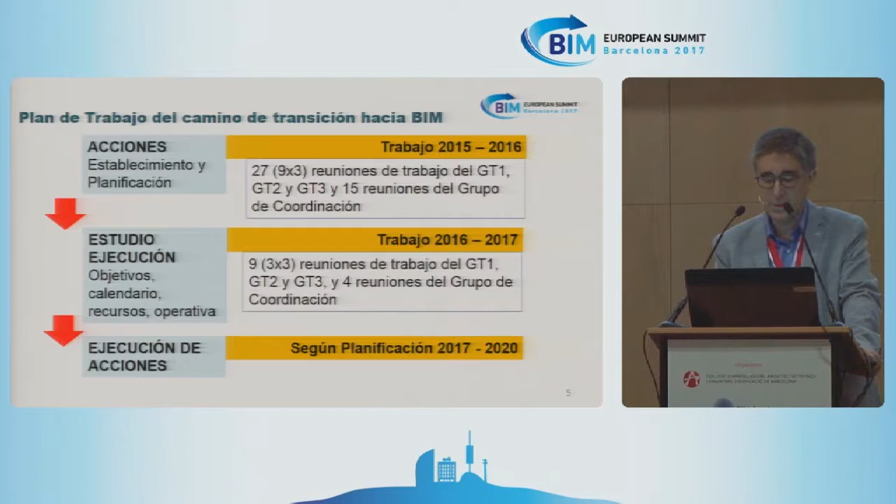According to our planning, we will celebrate many more meetings between 2017 and 2020. And how do we want to define and analyze all these actions that will be implemented? Victor Roch actually provided us with a roadmap based on the Canadian roadmap. Many things have been invented already, but we have so many choices available that this roadmap was a great finding for us.

In this roadmap, some axes were defined. In this case, there were 8. We can see 7 on screen, and then we have the 8th one, which is cross-cutting. Basically, these elements wanted to find some starting points and also set some finish points. Once this was done, we needed to define the actions and the timing needed to go from the starting point to the finish point.

In all these starting points, as I said, there are 8 in total. The first one is to align. This is very small on screen, I'm sure you cannot read it, but if you're interested, all our paperwork from the European BIM Summit will be available in a Congress book containing all the presentations, and you will be able to read it there way better. So if you are taking pictures, I know you won't be able to read it because it's too small, but it will be available afterwards.

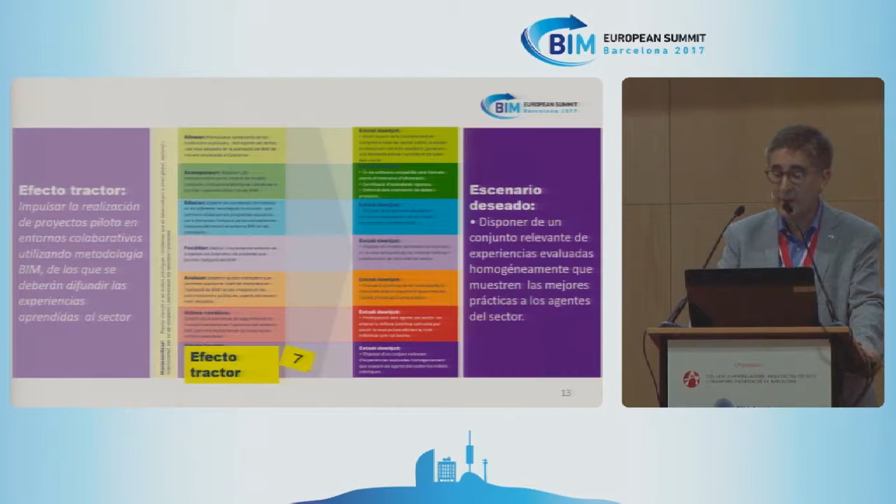We want to have the desirable scenario of having a set of experiences that will show the best practices to the different stakeholders.

The eighth axis is a cross-cutting axis. We want to harmonize. We need to pay attention to the best practices and initiatives at a local, national, and global level in order to share and harmonize processes and results. It doesn't have number 8 on it, but this is a key axis.

So far in our summit, we've had different speakers that have brought a lot of information and knowledge. However, if we only focus on Catalonia and Spain, we'll see that this is something we are working on.

Some may wonder, es.BIM does some things and then the people working in Catalonia do something different. No, we work in a parallel manner. We are always in touch. We know what's going on in es.BIM and in the Catalonia agents.

And this is a cross-cutting axis, trying to unify, trying to make everything homogeneous, and also making information available for all the parts that participate. This is very important because we need to move forward together with other committees that are also working in this direction. Maybe they are doing it in a different way, but with the same goal in mind.

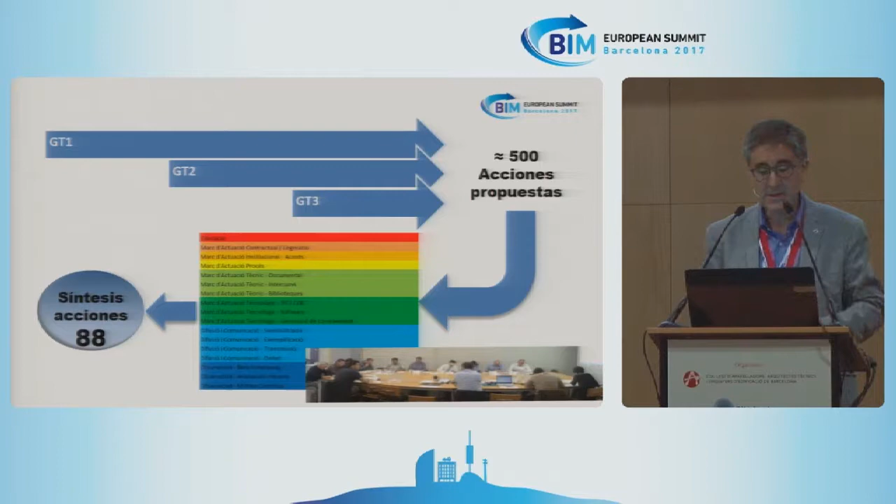The ITEC did a lot of work here, and we reached the conclusion that there were 88 actions that actually summed up the more than 500 proposed actions.

These actions have been defined. There were many personal surveys. As Mr. Rule mentioned this morning, all the members of the Building the Future Commission answered a survey, and after we got all the results, we got information about costs, timing, and priorities. We wanted to hear the voice of all the agents in this sector, and we wanted to know their opinion regarding all these aspects, because they are very important to clarify before we start moving on.

So after we got all the information from the surveys, we were able to make some agreements. We performed some studies, found tools, and were also able to promote outreach, create debate forums, and get some pilot examples.

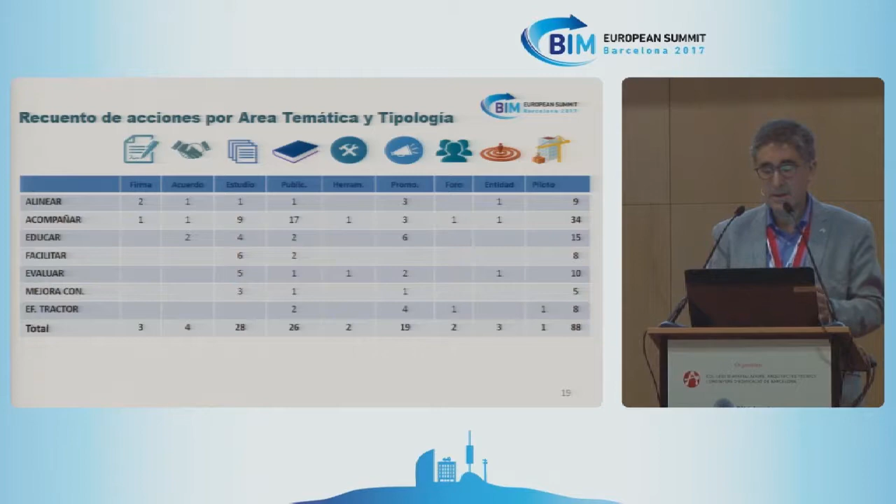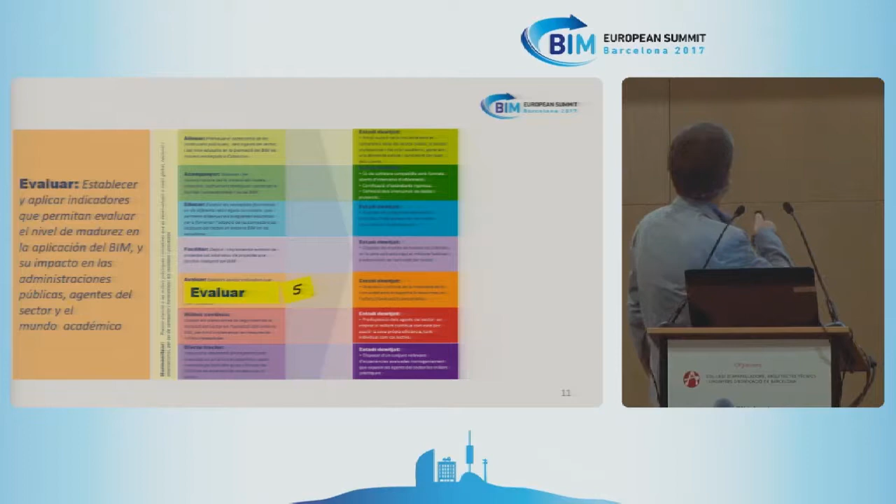These 88 actions have been planned, and we can sort them out by topic and different aspects. The result, if we look at it from a starting point perspective, we need to remember now. I'm trying to find it. Okay, so if we go from the starting point to the finish point, we will get to the last slide that we saw. Actually, right there, it's where we find the 88 actions divided by terms, or semesters, rather.

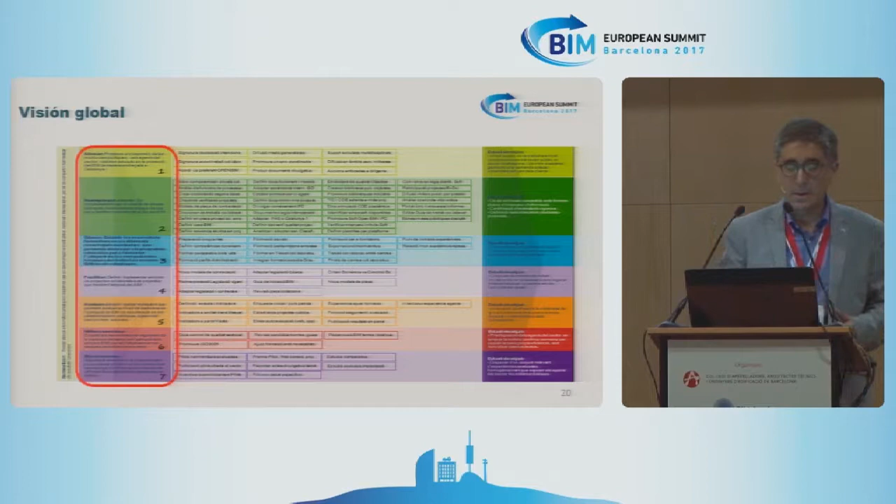This is what ITEC actually presented in the last assembly, where all the members of this commission attended, and I think that was very relevant. The members of the commission decided to bring their own funds in order to finance the first steps of the development of these actions. They didn't want to wait for public administrations to undertake this task. This is quite interesting, and I think it's worth highlighting, because they thought, well, if someone else does not do that for us, we'll do it ourselves.

So basically we see that we had the starting point and the finish point, and in between we have all these planned actions. Right now we find ourselves here, and then we are entering the second stage, answering how, when, and how much in order to implement the actions. I think I'm out of time, sorry about it, and I think that's it.

We actually got the agreement from the plenary assembly, who in March last year decided to move one step further so that the members of the Commission would finance the first steps. There are 40 of us, and we are welcome to have more people joining.

At the same time, as Ferran Falcó explained this morning, we have the Interdepartmental Commission of the Catalan government. They actually asked ITEC to draft the white paper to implement BIM in the public administration in Catalonia, which will also include the guidelines for this implementation. I also would like to remind everyone that BIM is just a part of three pillars: IPD and Lean. I think ITEC is one of the big supporters, and we have carried out many actions for the outreach of IPD, BIM and Lean as well. Thank you very much, and that's it on my side.

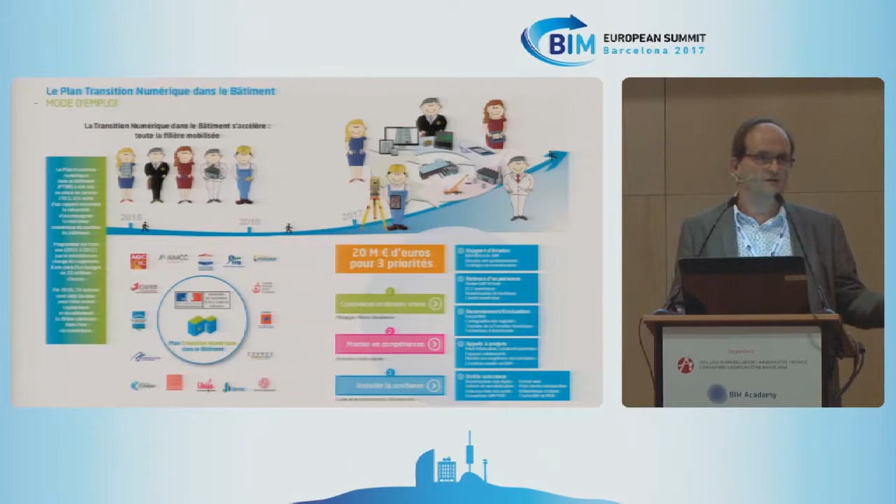This plan has 3 different axes. The first one is to encourage and motivate people to use BIM. The second axis, or pillar, would be to improve the competencies and skills in companies, architects, constructors, whatever it is. And finally, to install more trust. And to do that, we need standards.

A few outputs from this program or plan. The first one, guidelines for clients. This is very important because when a client wants BIM, they don't want to reinvent the wheel, right? So it's very important to provide the client with guides, also guidelines for the BIM exploitation plan.

Then we have a series of documents, for instance one regarding legal matters. Then we have the first draft of a dictionary of properties regarding BIM objects. Then we follow up some projects to define and identify best practices. Then we have actions to make an inventory of applications, software applications, formulation applications. We are also going to launch a collaborative platform, which is going to be free for small companies. And finally, there's the standardization roadmap.

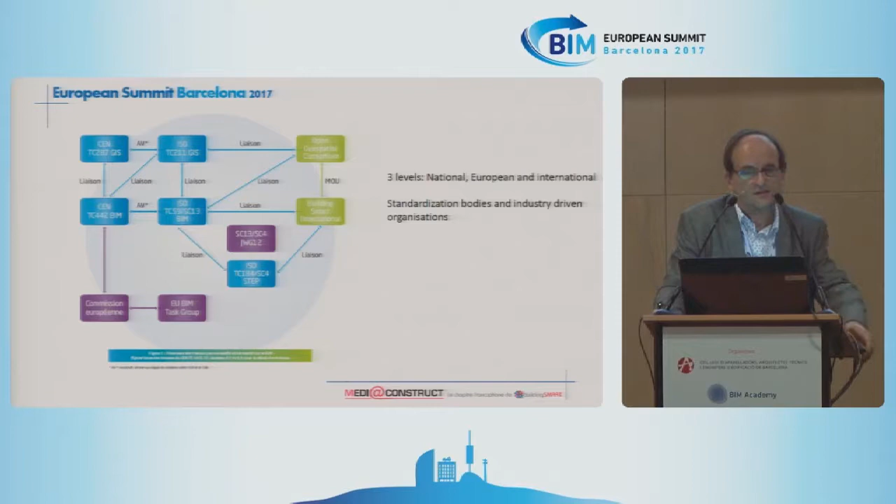This picture, this drawing, summarizes the content of the roadmap I just mentioned. It's the concept of a house with different floors. We begin from the third floor, which is the process floor. We are interested in the stakeholders and how they work. And the first technical topic here is the information delivery manual, which lays out rules and standards to define and describe processes and the information required.

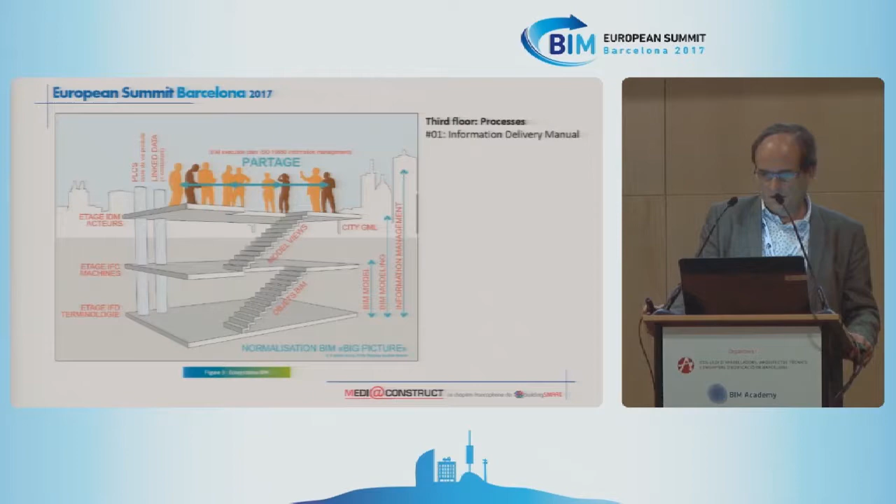The second floor would be about data, and there we approach the famous standard, the IFC. Then BIM must be an open format and also available to the public. Then there are initiatives to exchange comments on a specific model.

Then we move on to the first floor, which relates to terminology. The first thing we need is work on dictionaries. It's important, and for many years we have set the goal to create a multi-language international dictionary. I know it's hard, but it's really important, because the IFC is not enough.

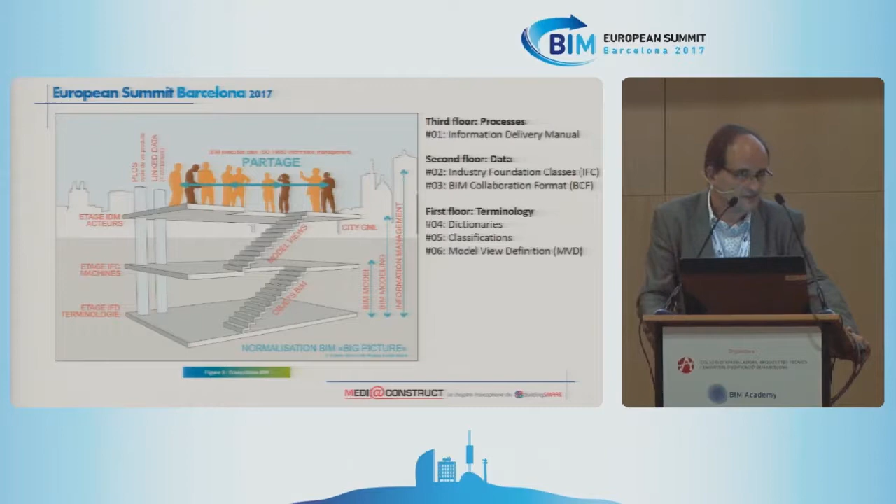We have to agree on the sense of each term and word. We also need classifications. In France, classifications are not widely spread. Omniclass or other tools may be used in other countries for classification purposes, but not in France. We need to pick some classifications, and currently there's a working group analyzing this different set of classifications to pick one, or at least adapt one of the existing classifications.

Finally, the model view definition. This is a methodology to define a set, or the whole model as a whole, and that would be it.

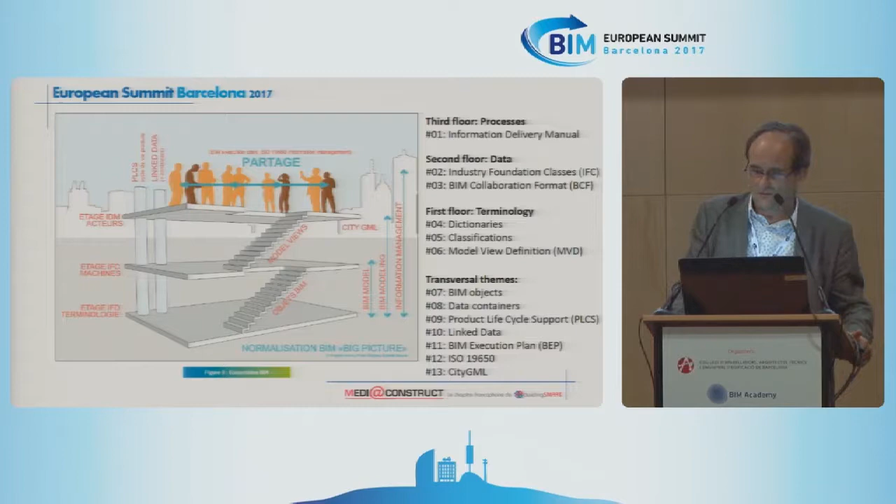Then we have cross-cutting topics such as BIM objects, different solutions that we call data containers. Then we have to bear in mind that when approaching a project, we have to think about the whole life cycle. The topic number 10 is linked data from the web. This is very interesting in order to exchange information between BIM and geographical information.

Then number 11, the BIM execution plan. Number 12, it's about a standard, an ISO, a standard in English.

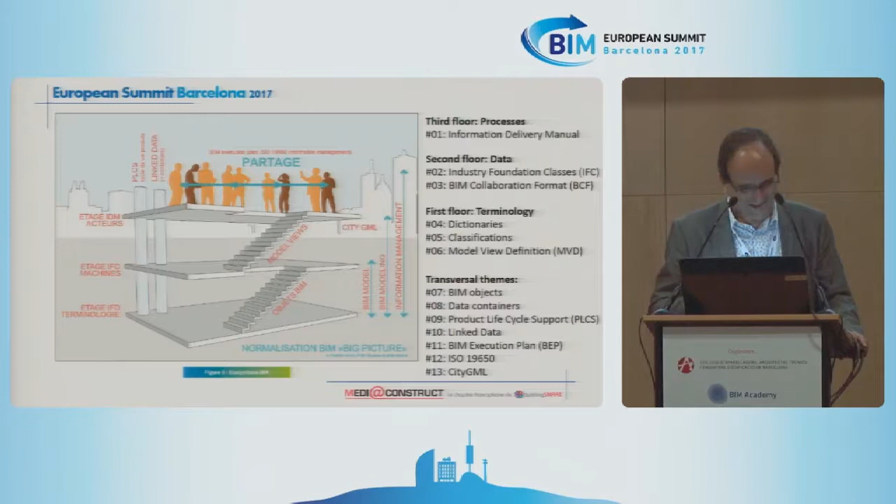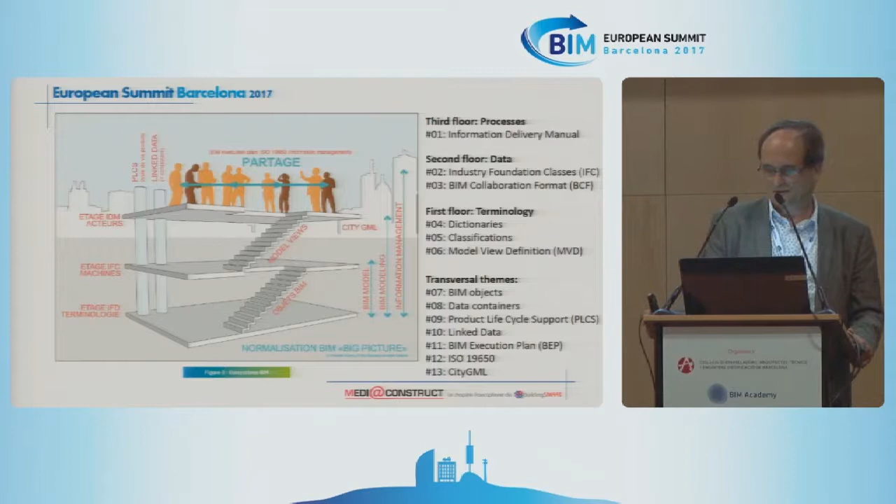And finally, the City GML. That would be the standard applied to cities, such as the IFC to BIM, then the GML is the standard for cities and municipalities. City GML is also a data model that complements IFCs.

And 20% of the contractors also used BIM, but that's a problem we have to solve in France. Currently, we are discussing with different companies and organizations so that more and more companies participate in these kinds of projects, both SMEs and large companies.

How many people in the audience have seen Marzia Bolpagni's Many Faces of LOD blog post? Only a couple. This was released last year in the summer of 2016. This is a fantastic blog post that traces the organization of LOD, which he uses as a start point, as you see on the screen, as one of LOX. LOD has multiple variations, multiple definitions. We use level of development in the United States.

If you're in the UK, refer to it as level of detail. But specifically tracking those starts, and the way we deal with it in the US, really focused on Vico Software back in 2004, which was really an originator of this idea of LOD.

In 2008, the AIA took that idea and started to apply more formal definitions. Those became part of our digital practice documents, exhibits to our owner-architect agreements and owner-consultant agreements, starting to set a foundation for what we're going to deliver as part of our BIM.

Ultimately, in 2013, the BIM Forum came along. BIM Forum's part of the Associated General Contractors of America, and they teamed up to author and further evolve those definitions, which has now really become a key standard in the United States. So those key collaborators are the American Institute of Architects, the AIA, and BIM Forum, which is part of the AGC of America.

We've been fortunate enough that as we've gained traction with this deliverable specification, we've been able to pick up more organizations, as you start to see at the bottom of the screen, that are becoming contributors. Since 2013, we've been able to progress and evolve this document to have an annual release cycle, all the way up to 2016, the current version available. If you go to the BIM Forum website and search for LOD, that's what you'll get.

Later this summer, the 2017 version will be out for draft and public comment, which anybody can provide feedback on. Our core group will get that information, and then we'll republish the 2017 version in November at our fall event. The big thing that's different about the specification is we're really not looking at BIM as a tool, a technology, a process.

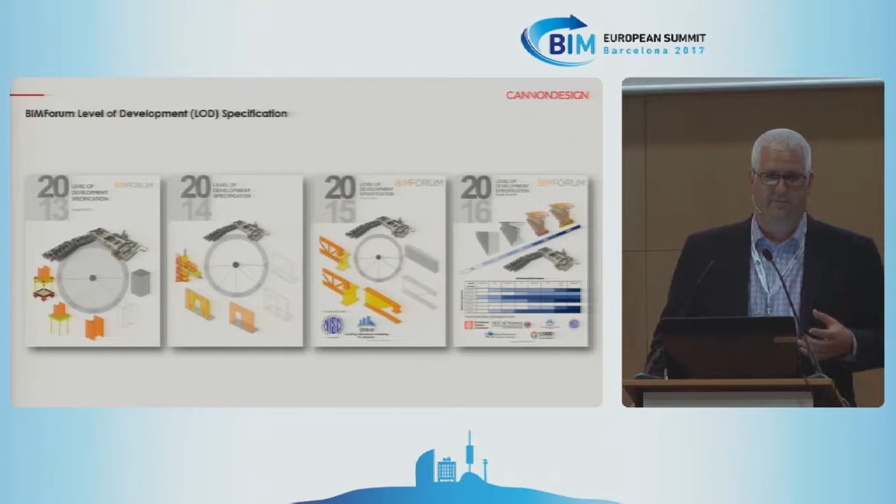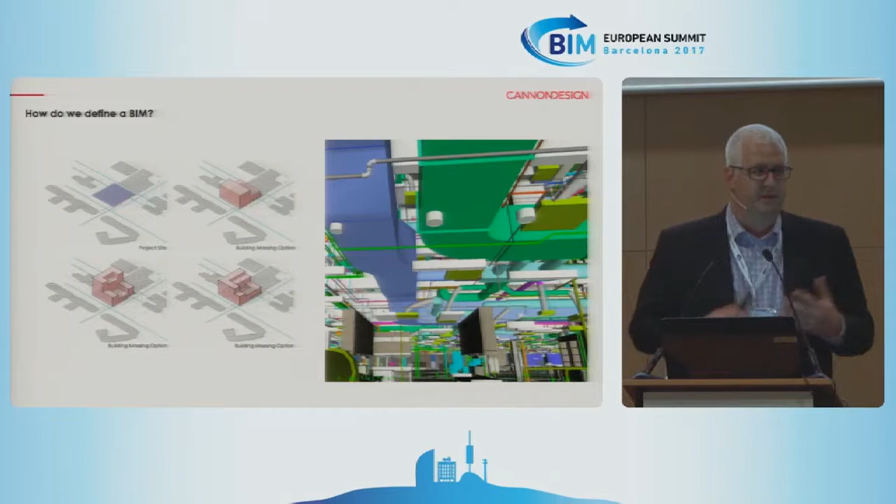The first one will allow you to do very early conceptual estimating, site orientation, get some sustainability feedback. That cost estimating is really an overall cost per square foot, how many floors, big round numbers that you're starting to get. I'd suggest that model has LOD 100 elements for walls, floors, and roofs, and that's really about it.

That's great, but we want to make sure there's not an expectation that you're going to be able to do clash detection, or shop and fabrication models—just like the image on the right isn't going to be capable of giving you those large, big picture schematic ideas.

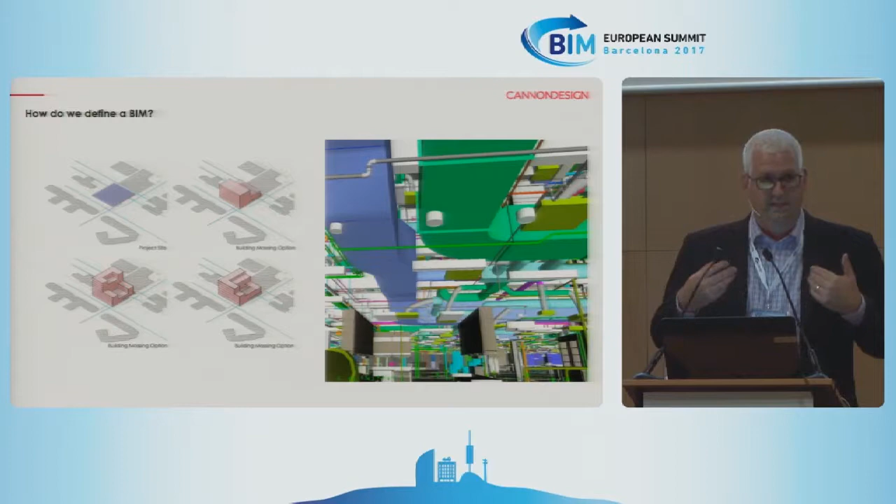We understood that there needed to be a way to define the differences and level-set those expectations, so everybody in the industry knew what we were talking about when we referred to level of development.

So in the release of that document, these are actually the major components that define what level of development is in the United States. The BIM Forum really set out to describe that as a way to articulate, with a high degree of clarity, the content and reliability of the BIMs we're creating—something needed over the course of the life cycle of the project.

One of the big things we talk about is there's no such thing as an LOD 100, 200, or 300 model. This isn't an inclusive description when we say LOD. It's about model elements, assemblies, and components—we're defining the wall, the floor, the roof, the door, the window, not the entire facility.

Those levels of development are definitions. It's like looking something up in a dictionary. It's not a prescribed standard. We're not telling the design or construction community that at the end of construction documents, your models and model elements must be perfect or meet certain expectations.

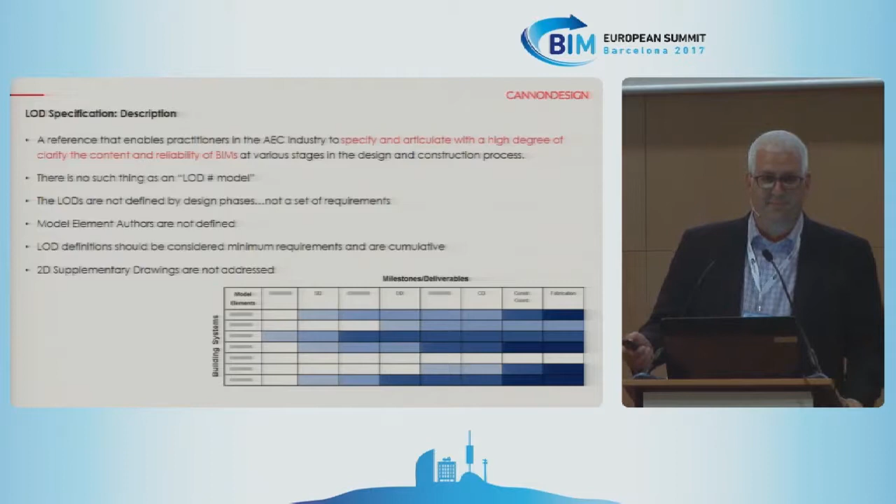We set the stage that these LOD definitions are minimal—this is the minimum benchmark to meet a certain criteria, and they're cumulative, building upon one another. They don't address two-dimensional information. This is a BIM level of development specification, so that makes all the sense in the world. It's really about how we're communicating.

There's information that we as an architect or engineer know about what we're documenting that the recipient, maybe the contractor, maybe one of our other consultants, will not necessarily know. It might be unintended information that isn't useful or reliable.

If we see the sketch on the left, it's just a door. All we know is there's a doorway going into a building, into a room on the left-hand side. We don't know the size, the height, or really where it's located. It's just schematic. If we look at a CAD drawing or two-dimensional output, now we're starting to benchmark where something is. We can put a dimension down and say this is where it's located. We can put a door number down so we can go to the specification of the door schedule and find very specific information out. In a building information model, we might simply put a door in.

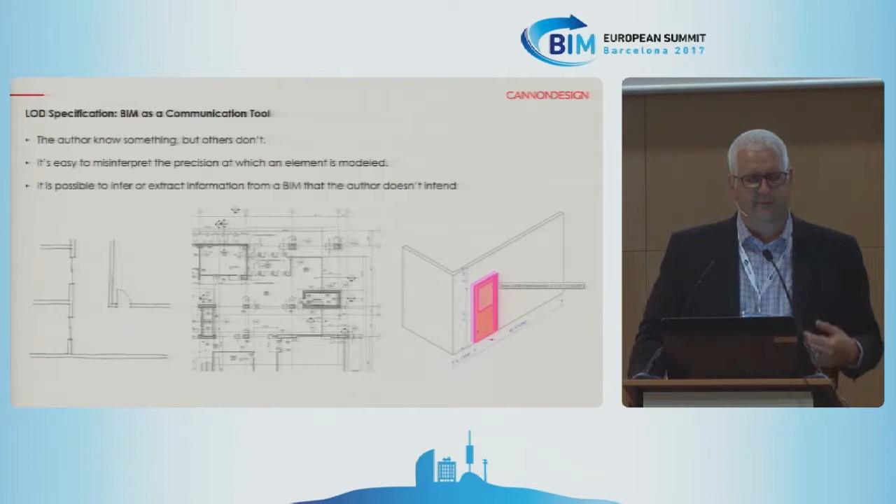Where is it located? We could get these strange, inconsistent dimensions. We may have just grabbed a door quickly out of our list and put it in as a placeholder, because it looks good in plan—that was the output. But if somebody selects it, they may interpret what door type it is, what material it is, what finishes are on it differently than what we intended as the designer. That's something we want to be able to control by using this LOD communication.

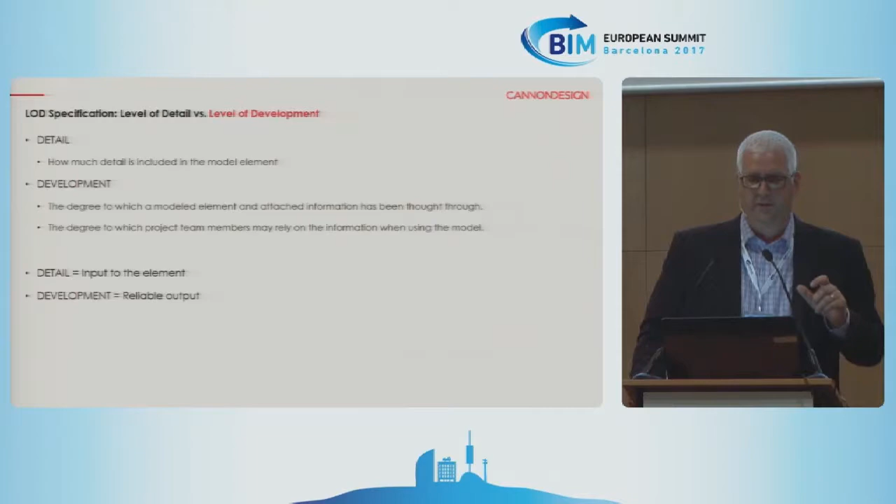We're not talking about detail and how much granularity is put into a model object or what it looks like. We're talking about development and how reliable it is. How reliable is that output? How well has it been thought through? What can it be utilized for? Those are the big ideas we're looking at when we talk about development.

We have 6 key points of evolution for this conversation, 100 through 500. The first really talks about being able to put something in that's a symbol or a generic representation, very much like that building block model we saw—it's really at 100. There's some idea of floors and walls. It's really all we know about it, but it doesn't yet get to the point of being a generic system or meeting the expectations of a 200 definition.

Here we can start to identify building components from one another, and we start to have approximate size, shapes, and quantities. Those may change, they may move, they're going to evolve through the design process, but that's where they're at right now. We want people to know that's what they can be relied upon for. At 300, they become specific assemblies. They can be dimensioned from, they can be queried in the model and trusted and relied upon at that stage.

Once we get to 350, we start to look at this idea of a model that also includes interferences with other building systems. So a piece of mechanical ductwork at 300 may just be a rectangle, but by the time we get to 350, we start to see insulation and hangers—those are the things that take up space. We typically call these elements trade coordination model elements at 350.

As we evolve it to 400, we start to see fabrication and shop drawing ready information, a shop drawing model that we start to have at 400. And then at 500, it really talks about at the end of the project, what are we doing to field verify that information that's currently in place in our models.

It's also important that this LOD document, just like we started to hear about in the last couple of presentations, is focused on a classification structure. For us, the BIM Forum is reliant on using the Uniformat classifications, a standard developed by CSI in the United States, the Construction Specifications Institute, as well as the Construction Specifications Canada, CSC. These are the two major organizations we use in North America.

They categorize things from level 1 to 5. On the left of the screen, you see the major level 1 categories, and then how we incrementally dig down into those and become more defined from level 2, 3, 4, and 5.

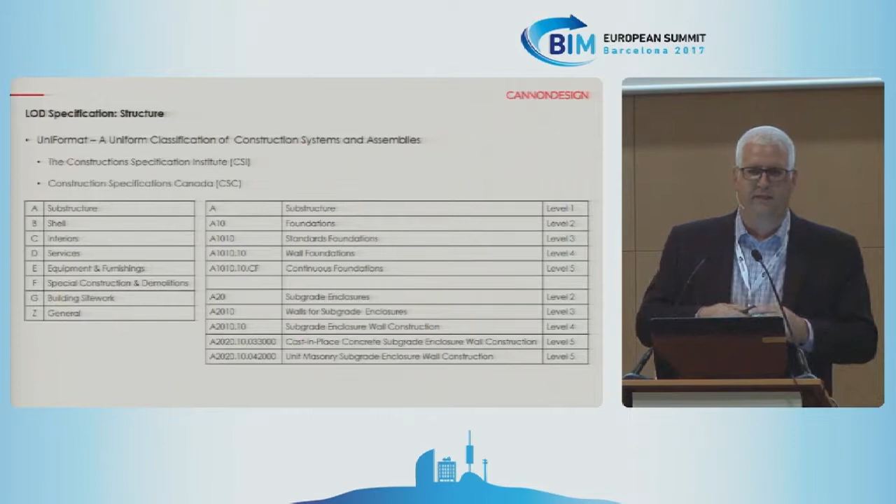This is a great way to have some consistency in the documents and be organized about what we're doing. The image on the screen is actually a level, this goes down to level 5.

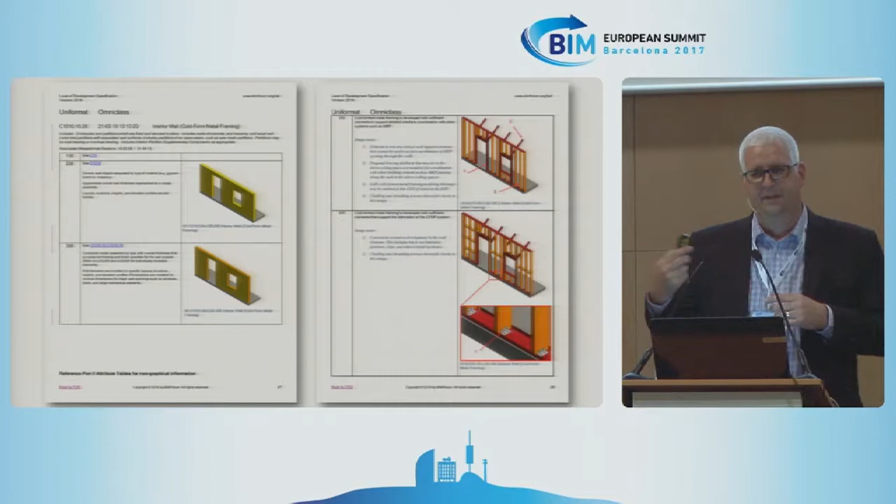C1010.10.20 is the Uniformat classification for an interior fixed partition made of metal studs. As we get from up to level 200, we see maybe a skinny wall for an interior wall and a thick wall for exterior. By the time we get to 300, we know there's gypsum wallboard, a layer of metal stud, and another layer of gypsum wallboard, so now we understand all the layers. When we get to 350, we start to see the kickers and major structural components, and at 400, we know we can fabricate that and know how to assemble those elements.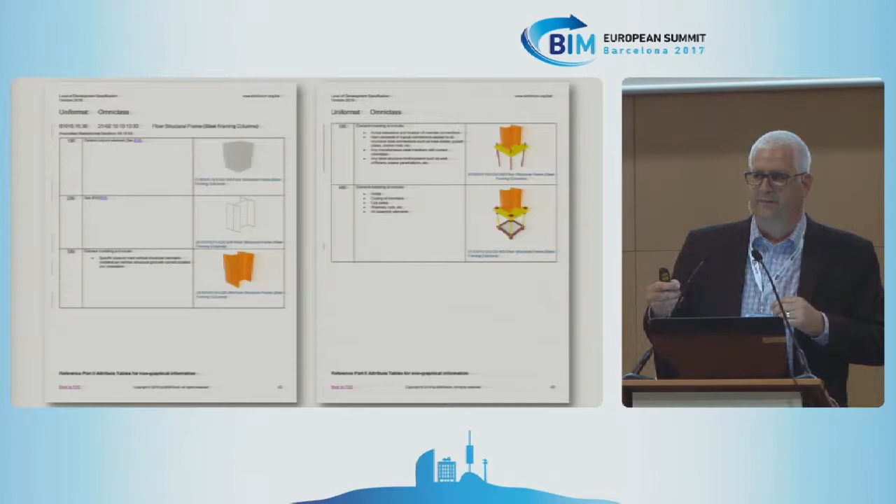Much the same when we deal with a structural element, we just know physically something is there holding up the building. By 200, we know if it's a concrete shape or a steel shape. At 300, we know it's a W10 by whatever, and then we build in the fabrication level details as we progress from 350 all the way up to 400.

Model elements can really be put together at different stages, like you're seeing on the screen. Again, it's not a LOD 300 model - there are 300 components, 200 components, 100 components.

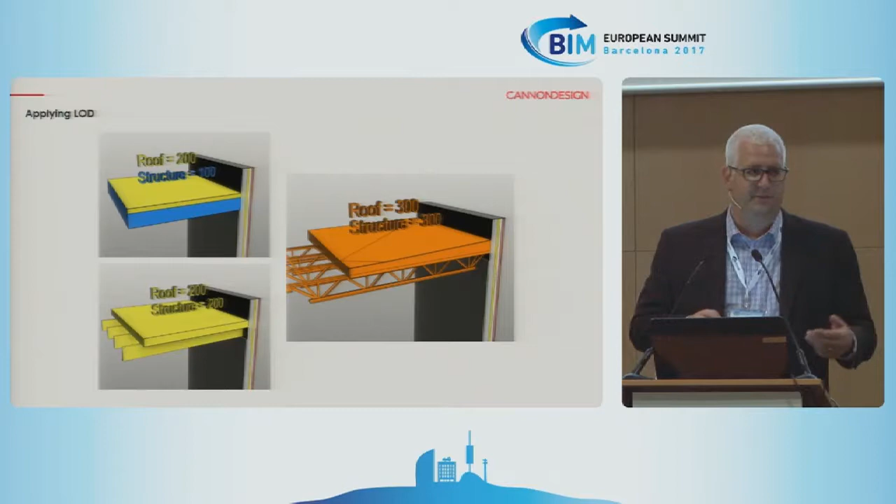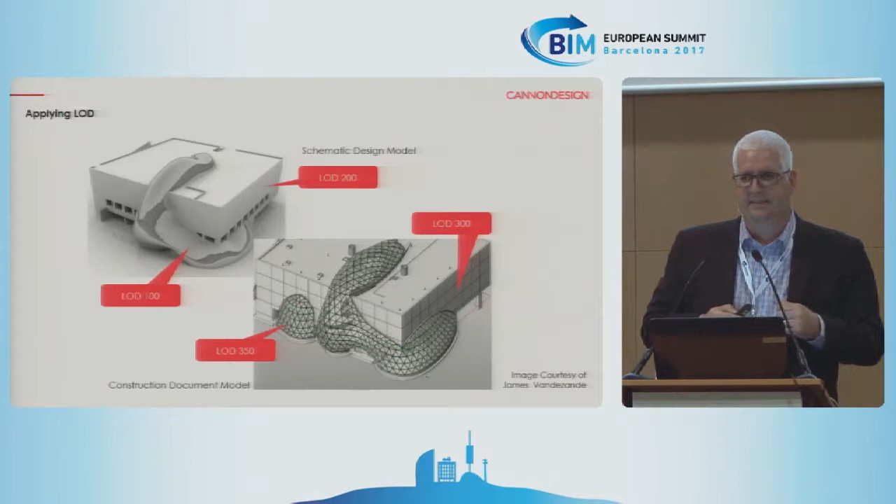When we talk about the LOD specification, we're not just looking at geometry either. This document has evolved - in 2013, that's all there was, geometry, but now we're also including data, and we have the model element table, which has associated attribute information.

This is a long list that is organized by building systems based on that Uniformat classification. What it does is give us the opportunity to look from that master segment and find what we call attribute tables, which we'll talk about in a second. Those attribute tables show all the possible data elements that can be built into those individual components or assemblies.

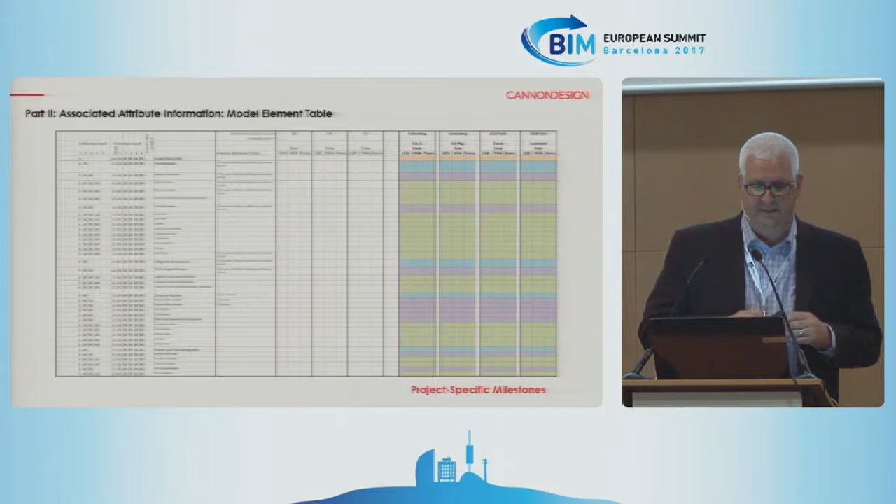What we want to be able to do is use this as a worksheet to document when that information is going to be applicable to our project, as far as project delivery milestones, or where it may be applicable to a specific BIM use case. In this case on the screen, you're seeing estimating and LEED or sustainability calculations that you might be looking to track. Those baseline attributes take us here.

All of the possible data points that we may want to capture about one of those individual elements is listed out here. At the top of the screen, we have the baseline, which considers these the minimum criteria that you need in that element.

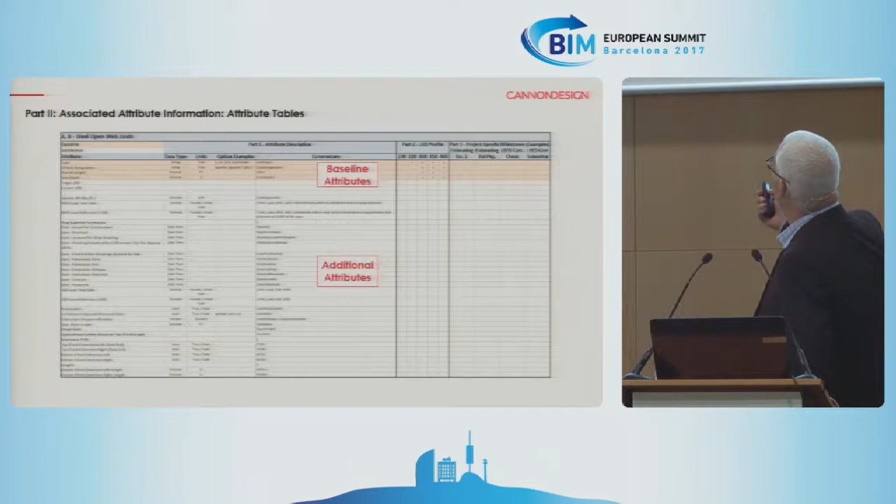We start to see what data type it is as we move across the screen. So we have data types, we have units, and then we also have what the different variables are that you could potentially put in the commentary section. So we move across and say at what level of development does this become important, and what are its use cases on the end.

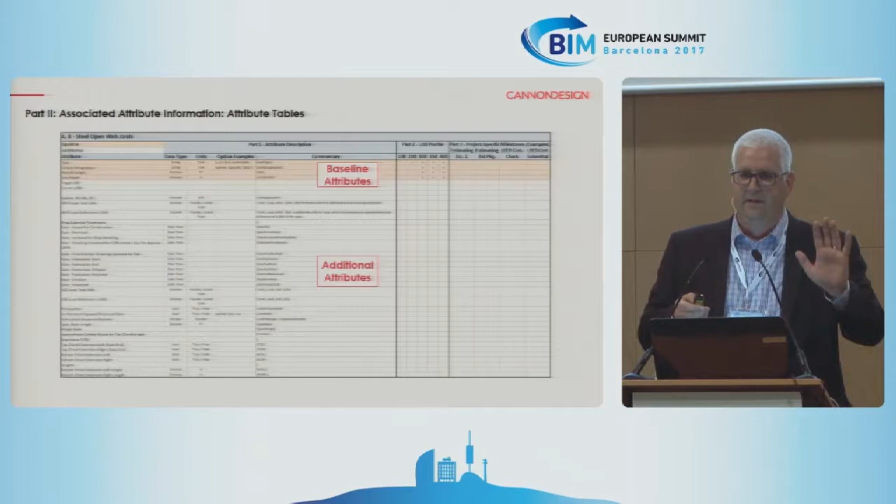Now we've created this holistic environment for both data and geometry about the building information models we're creating. This gives us a high level of reliability to share that information and say, this is what's in the model, this is what's been figured out, this is how you can use it, as we start to partner and share that information.

While the LOD specification is not specifically a standard - it's a specification, a guide, a dictionary for that information - the US market and the AIA have started to evolve to have additional contract language that can be utilized. Whether it's our owner-architect agreement or an owner-contractor agreement, we're able to attach what's now called the AIA E203, which is a BIM and digital data protocol exhibit.

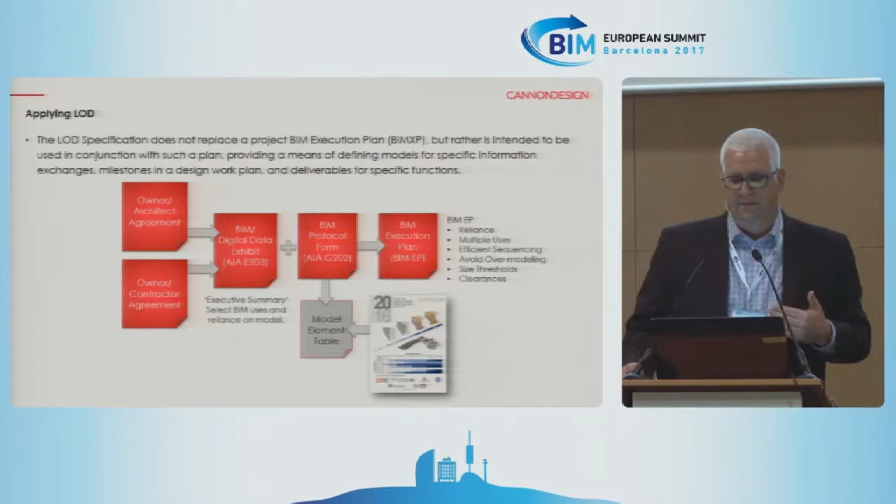That really is, as it states on the slide, an executive summary that references how digital data—a very inclusive topic all the way down to emails and contracts, shop drawings—but also how BIM can be used and relied upon in the model. There's a specific protocol form, the AIA G202 document, that allows us to complete a model element table, much like we saw on the screen, and also reference out to a BIM execution plan so we can further detail how the project team is going to use the BIM throughout the course of the project.

So what you're seeing now is the AIA G202 from 2013, and the image on the right is actually that model element table. Again, you see that uniformat structure. You can define at what LOD that model element will evolve to at that milestone, who the element author is, and what notes you may have about it. Those notes might be additional inclusions or exclusions from the minimum baseline standards we've outlined in the document.

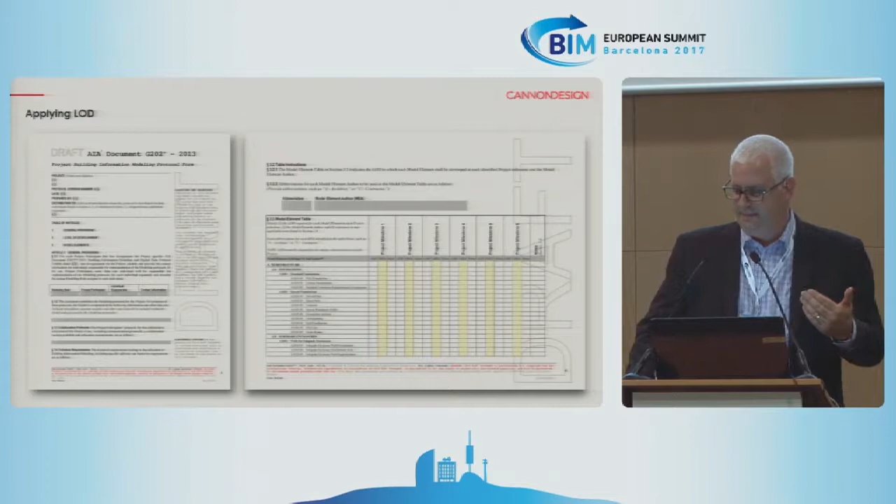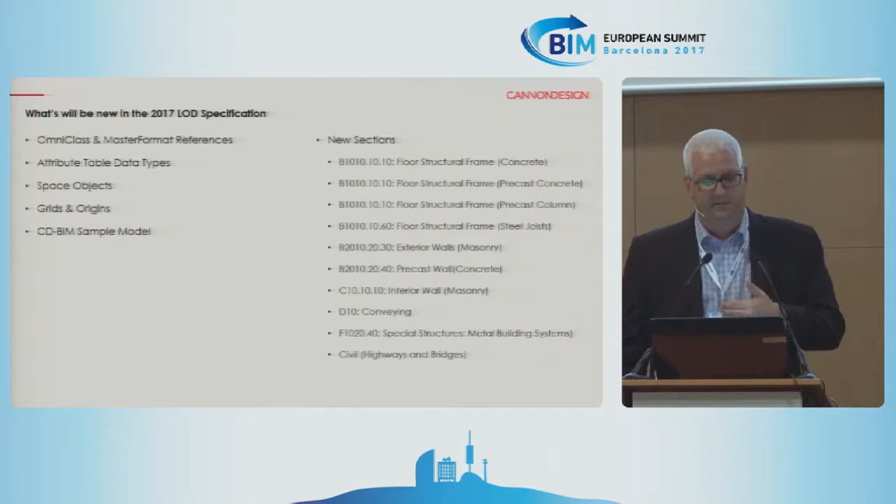As we move forward into 2017, I said we'll be able to download this here early this summer. There have been a whole series of new sections. Interesting that a lot of the conversations today already focused around civil and infrastructure—one of the new areas we started to document was this idea of civil highways and bridges. So that's a new expansion we'll start to see in that document. A lot of other structural elements have been added recently as well.

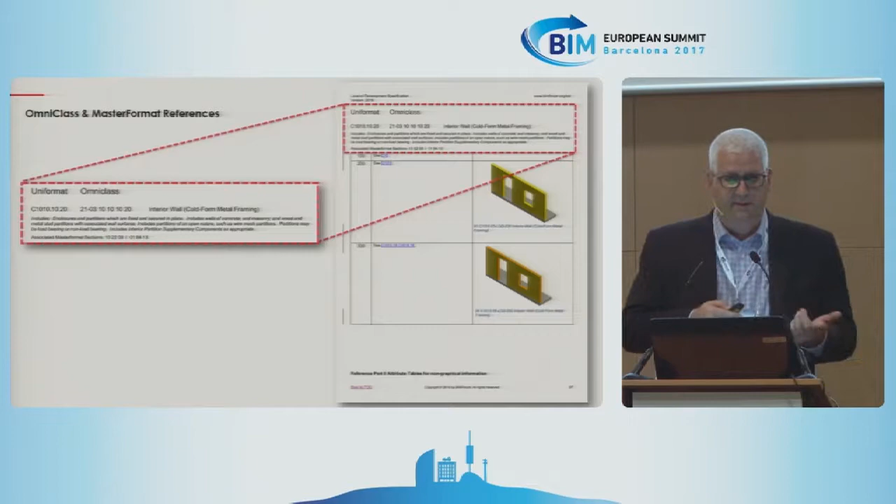But back on that idea of classifications—while Uniformat is great to track assemblies of building elements, we also found it important to relate that to other standards, so being able to use OmniClass. Now every classification section has a mapping number back to OmniClass, as well as the associated MasterFormat sections that are utilized in a traditional specification in the States.

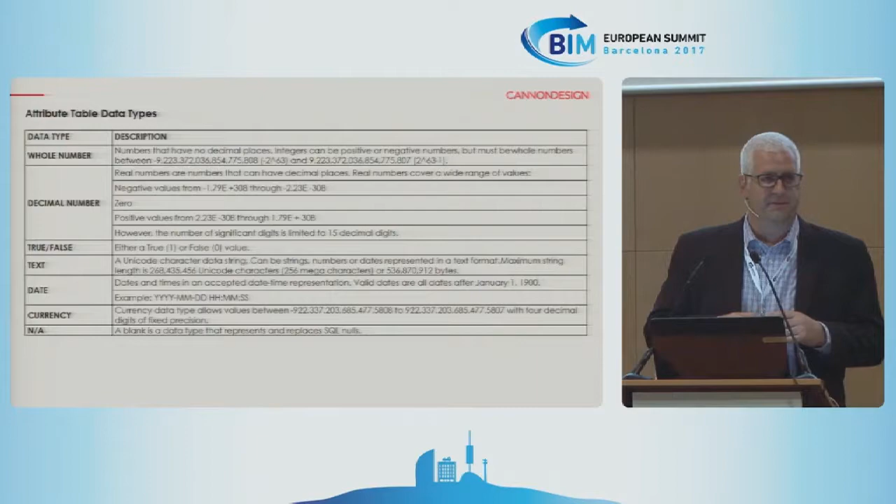We also talked about standardizing and organizing data types. How are we going to categorize whole numbers, decimal numbers, deal with true-false statements, dates, different levels of information? Let's be consistent about how we approach that and standardize it for our documents.

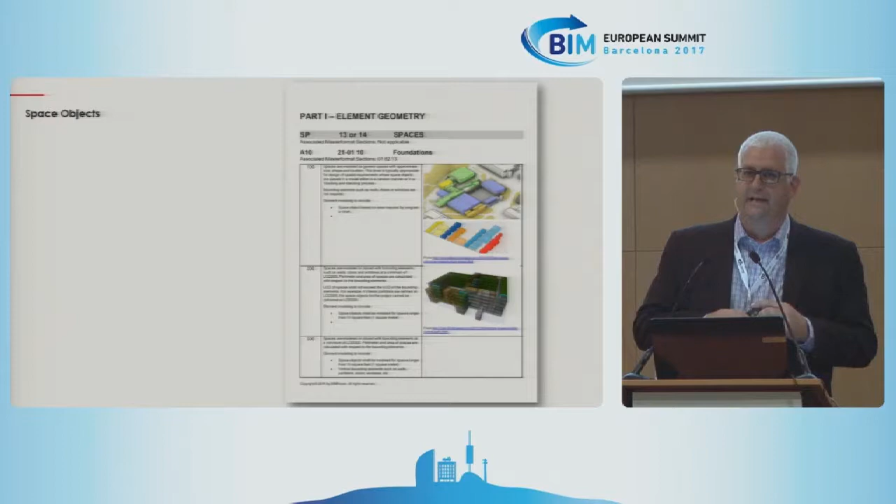It was also important for us to deal with rooms. We spent so much time dealing with the geometry that bounds the space—how are we actually dealing with that spatial asset that's inside of it? That has a life cycle all the way from the initial planning and programming and room data sheets all the way down to turnover for an owner to track those as spatial assets in the building. So we wanted to make sure we were including that as part of the LOD specification as well.

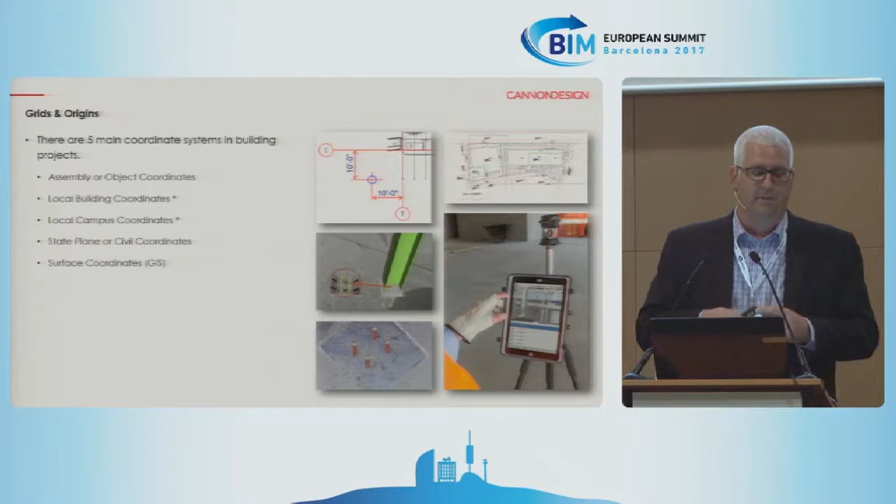Grids and origins and start points—we all know we have multiple models we're trying to pull together. How can we speak a common language about where the insertion point is, how we track that from a model-to-model comparison, how we engage models versus laser scans, and how we start to use different systems for tracking the location of elements and shooting those coordination points out on the job site? We need a common language at both a macro and a micro scale out on the job site.

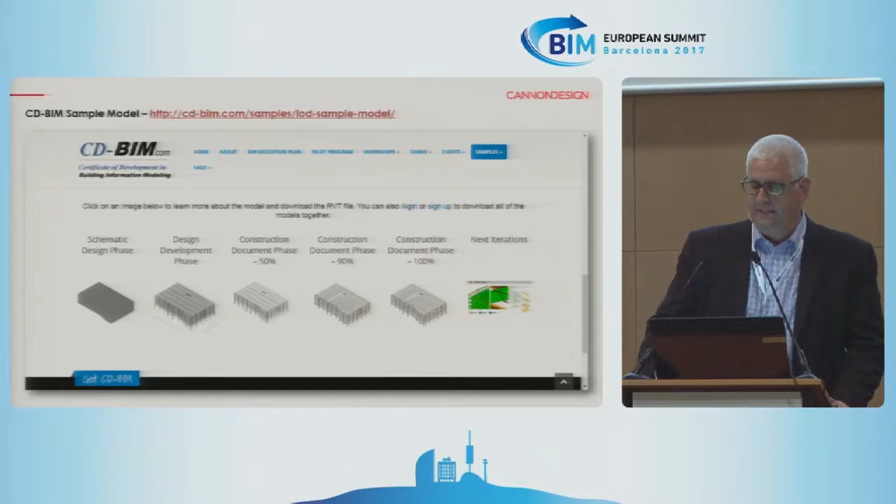And lastly, one of the things BIM Forum has done in collaboration with CD-BIM is actually providing sample models that highlight how these LODs evolve throughout a project. What's available right now for free for anybody to download at the link above—if you just go to cdbim.com, you'll see this at the bottom of the screen where you can download these models. What we're seeing is throughout different schematic design, DD, and multiple stages for CD, individual models showing how elements have evolved at certain stages, being able to color code them and dissect them.

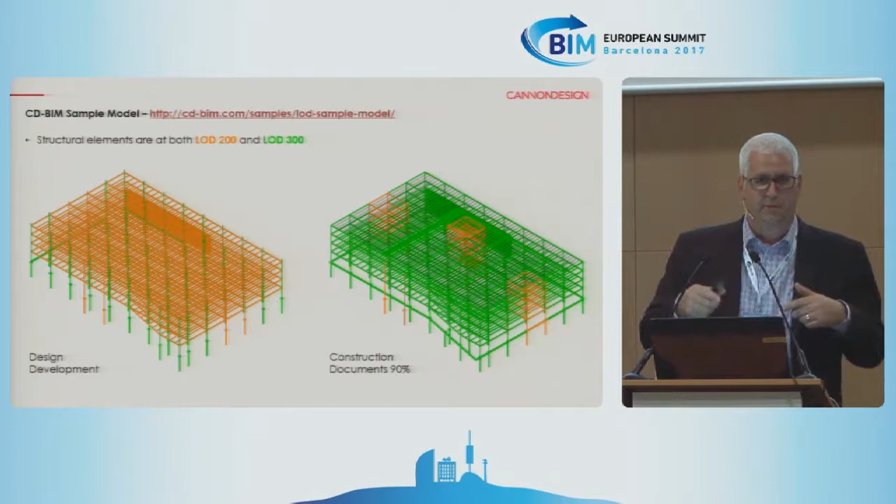These are actually downloaded right now as an RVT file. They're going to evolve to be usable as an IFC file that you can download, and they have data points in them as well as the attribute tables that are there. So now you can start to see practical examples of what is in place. The only thing that's there right now is structure—we're continuing to build this out, so there'll be much more information attached to these in the very near future.

So in closing, one of the things we want to remember is that when we talk about LOD, level of development, it's a language, it's a communication tool. That specification is actually a dictionary that defines those minimum requirements about how we share information.

It's not about the entire model, it's about the individual systems that are in place, and it's focused on setting an expectation for the reliability and use of those model elements by the continued design team, the build team, and ultimately the owner once they receive this at the end of the project.